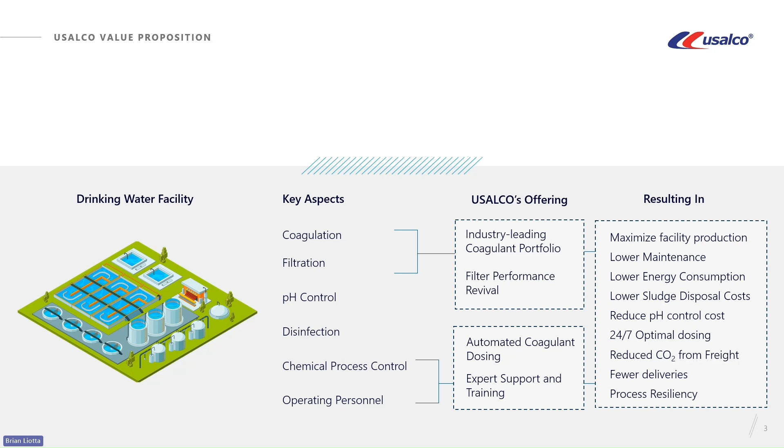As far as our product line goes, we offer a diverse range of advanced coagulants and polymers tailored to optimize water treatment processes. Our signature brands like DelPAC, UltraPAC, G-PAC, Delta-Floc, and UltraFLOC provide specialized solutions for various treatment needs. For iron and aluminum specifically, we manufacture a pretty comprehensive range, including all sorts of PACs and iron salts designed to enhance coagulation, reduce sludge, and improve water clarity. And our polymers, like the polyDADMACs and epis, offer additional tools to support efficient coagulation and liquid-solid separation.

And just to add a final comment before I turn things over to our other presenters, our product line is really infinitely customizable, and we take this approach to water treatment recognizing that every water system has attributes that make it unique. So ours is not a one-size-fits-all approach. We take a consultative view on each and every opportunity.

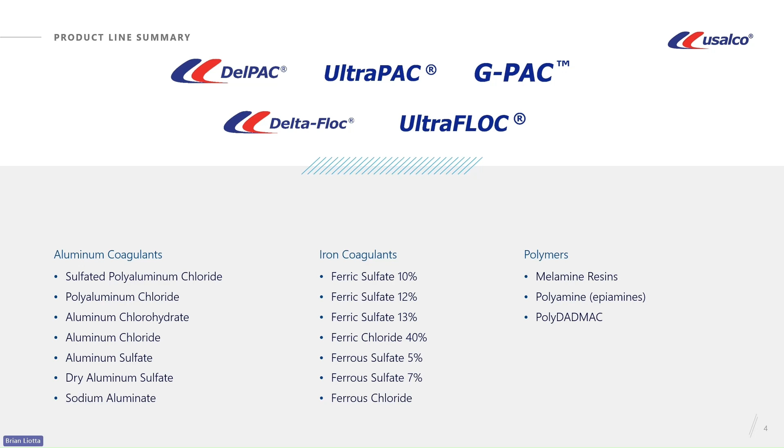And with that, I'm going to hand it over to Chris. All right. Oh, here just a moment. Let me get this back.

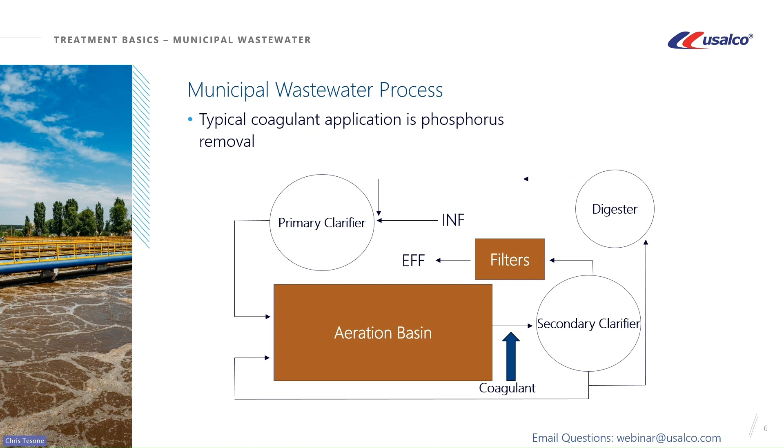Typically in a wastewater plant, the goals are phosphorus removal and improved settling rate. Is there an alkalinity impact? And if there is, try to minimize that. Always looking at sludge: can you reduce the amount of sludge? And then overall clarification. And this is more applicable in industrial applications rather than municipal, where you're looking at BOD, COD, FOG, in addition to phosphorus.

Phosphorus, it's a little more complicated. And one of the things that I always ask in working with municipalities or industrial customers, especially municipalities, is, what are your goals? Is it strictly phosphorus removal, or are you also looking for something that's going to help settling in your final clarifiers? Are you having any struggles with alkalinity? Are you using caustic or lime to boost that alkalinity, et cetera? So as you kind of do a people and a technical survey, those are some of the questions that you should typically ask.

And Chris, can I ask? So what I think I'm hearing is that municipals primarily use coagulants for phosphorus removal, whereas industrial users will use them for a variety of reasons. Yes. I mean, it's just a more complex wastewater. Municipal wastewater, and we'll get into this later, the characteristics of a municipal water influent, whether it's strictly residential, commercial, or if there's some industrial, that makes a difference as far as maybe your approach in the coagulant technology that you would use. But for the most part, in my experience, municipalities are strictly looking at just P removal.

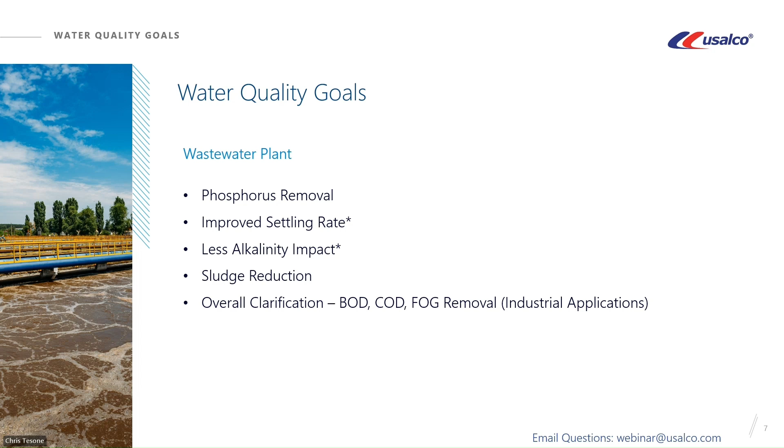So why is there a need to remove phosphorus? Essentially, nitrogen and phosphorus are essential nutrients for aquatic plant growth. And if there's too much nitrogen and phosphorus, a body of water can become what they call eutrophic, where you could have excess algae growth, depleted oxygen to sustain fish, unsightly odors, also potential toxins, microcystin. I think maybe folks on this call are aware of the problem that Toledo had, where the Toledo water plant was shut down a few years back because of a serious algal bloom in the western basin of Lake Erie.

Algae growth is also limited by the least available nutrient, which is phosphorus. Now, one of the developments, I believe it was probably 5 or 6 years ago, there was a study out that basically said a wastewater plant should not be too concerned with removal of nitrogen, because algae can fix atmospheric nitrogen on their own. So really, trying to reduce the amount of nitrogen discharged to a body of water really didn't matter, and the focus has to be on phosphorus.

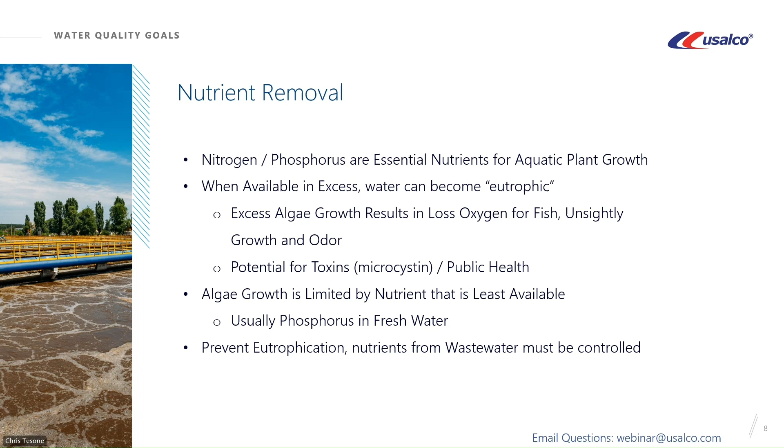When people think of phosphorus, maybe just to clearly define what it is and what it isn't. Pure elemental phosphorus is rare. Typically, phosphorus exists as a part of a phosphate molecule, and it can be organic or inorganic. Organic phosphate obviously has a carbon-based molecule associated with it, and it's in plant and or animal tissue. Phosphate that's not associated with organic materials is inorganic, and that form is required by plants. However, animals can use either organic or inorganic phosphate. And both of those types can either be dissolved or suspended in water. And that's an important point between soluble and insoluble phosphorus that we'll touch upon as we go through the presentation.

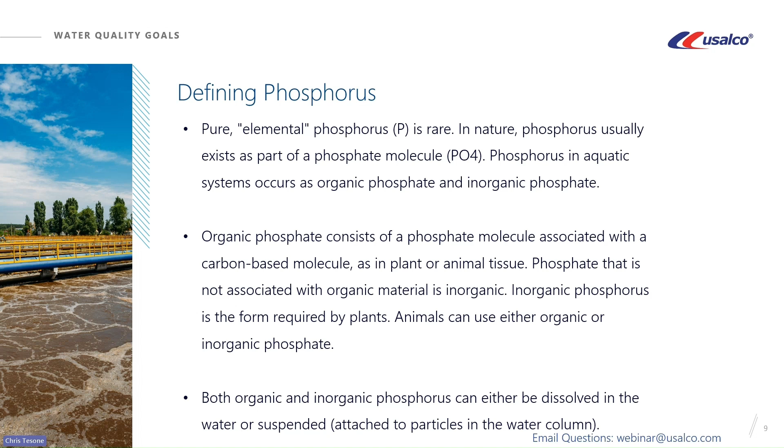Some operational definitions: most people know or measure total phosphate or orthophosphate. Orthophosphate is mostly dissolved and highly reactive, whereas you've got acid hydrolyzable phosphate, which is polyphosphates, metaphosphates, that are somewhat reactive. And then you have, I don't know if you would say they're exotic phosphates, but phospholipids, nucleotides, et cetera, which are mostly particulate but less reactive. And when we talk about reactive, we mean readily removable, that will readily react with a metal salt to facilitate removal. So what this is saying is the hydrolyzable types of phosphate are not completely removable, and the acid hydrolyzable we really can't remove. But for the most part, in a municipal application, most of your phosphorus that's coming into the plant is highly reactive.

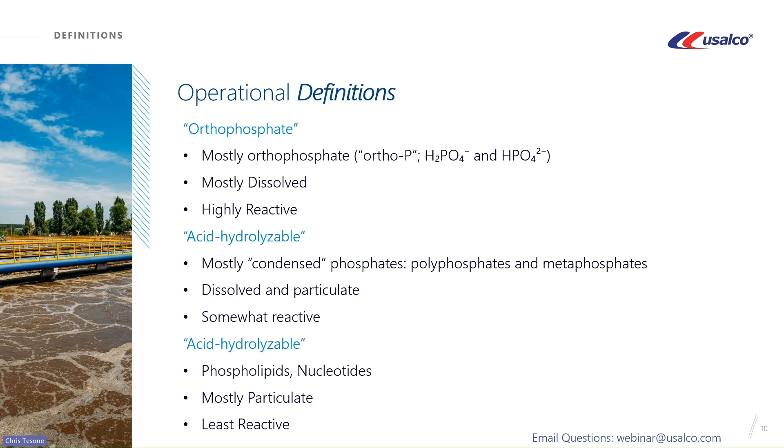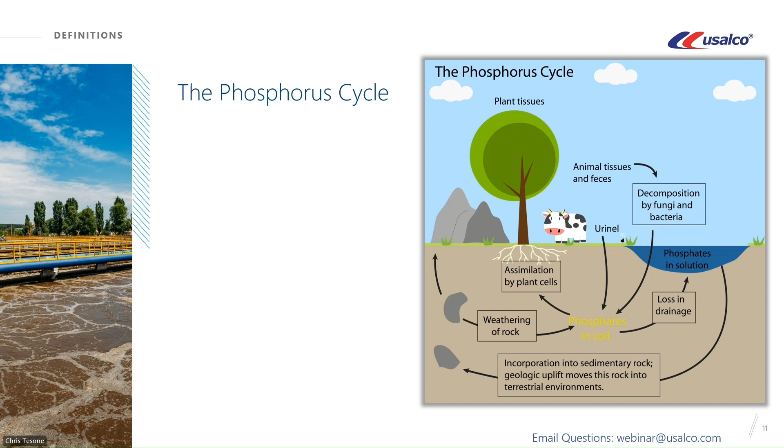Monitoring phosphorus, there's the total orthophosphate test. There's the total phosphorus, dissolved phosphorus. And I guess the point in all this is that, and we'll touch on this later when we talk about bench testing, the EPA, or the regulatory agencies, measure total phosphorus. So they really have no concern whether the phosphorus in their effluent is soluble or insoluble.

But it's important that we know that to be able to solve problems, but also to be able to do baseline bench testing, because really the focus of the coagulants is the reduction of soluble phosphorus and creating an insoluble material that's easily settled.

Phosphorus removal, and maybe this is a bit of a dated slide. It talks about the EPA mandating phosphorus in plant effluent. And that's still true, but my experience over the years has been that the federal EPA has kind of turned this over to the states. And restrictions do increase over time, but not as quickly as I anticipated 5-10 years ago. More and more municipalities are getting P limits, but it's not the magnitude that one would expect.

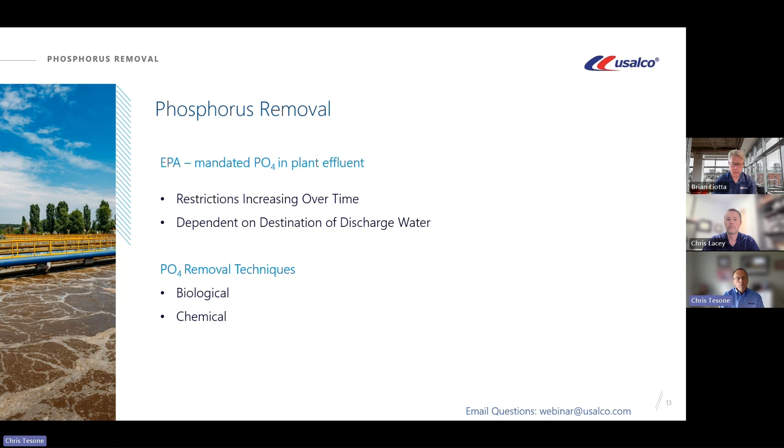We talk about technologies, biological and chemical. I've run into over the years very few plants that have strictly biological P removal. A couple reasons. Number one, you have to have certain nutrients and characteristics of your influent water, and that has to be consistent. And number two, one plant may have bio-P removal, another tries it, and it doesn't work because it really is specific to the influent. So I don't see many plants with biological removal. I do see some that go back and forth or use chemicals to supplement phosphorus removal.

For the longest time, it was believed that the reaction of a metal salt with phosphorus was strictly a precipitation reaction. Chris has referenced where this information came from on the lower right here, but really it's the reaction of the metal salt with the natural alkalinity in the water to form what they call an HMO. It's not a health maintenance organization, but a hydrous metal oxide.

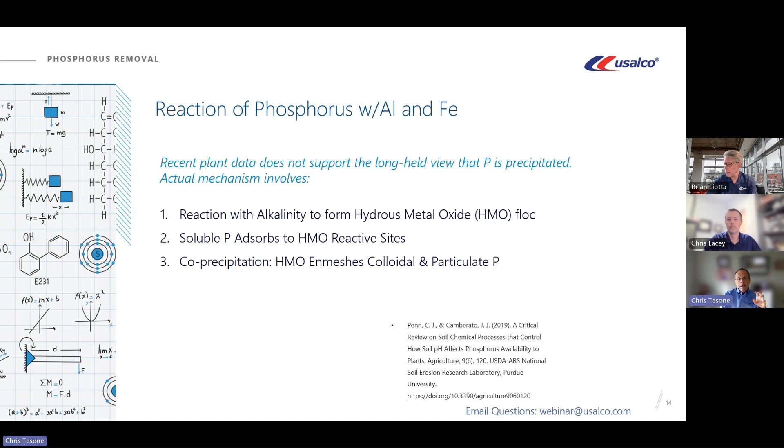Essentially, the soluble P will adsorb to the HMO reactive sites. And you also get a co-precipitation where the hydrous metal oxide will enmesh the colloidal and particulate phosphorus. The next slide does a really good job of depicting that. Thus, it's really important that you implement your coagulant at a point of good mixing to optimize the efficiency of your chemical dosage.

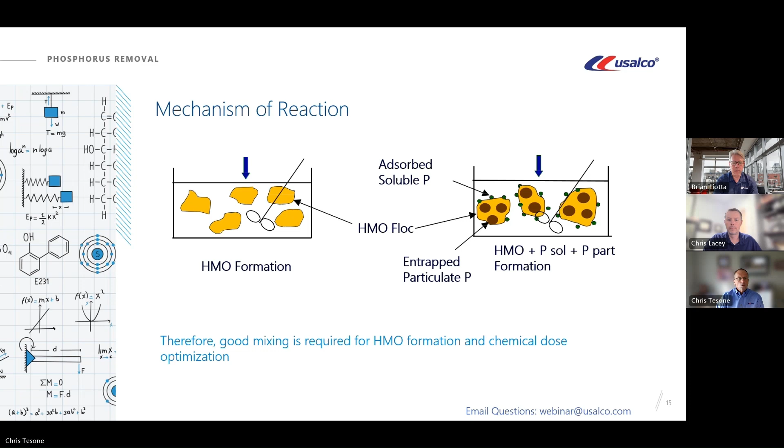So, when you look at a typical wastewater plant, usually you'll see 2 to 6 ppm of phosphorus in the influent. And largely that's residential. You may have some light industrial, and you can see here, if you have a food or metal processing plant, you could get higher levels of phosphorus, much higher, and they could be somewhat inconsistent depending on the process associated with that industrial discharger.

One of the things that I recall with an industrial discharger, there was a plant in Indiana which was taking phosphorus-laden waste from a meat packing plant into the municipal wastewater treatment plant. They'd just gotten their limit, and they were getting probably 16 to 20 ppm. They started off using alum, and they just couldn't meet their limit. They went to polyaluminum chloride, couldn't meet their limit. And then we got involved and took a look at things.

What we found out was that they were feeding enough, but they were overfeeding the coagulant so much that it was destabilizing the floc. And what was going out the door was more insoluble phosphorus than soluble phosphorus. So it was just too much for that particular coagulant to handle. So we looked at sodium aluminate, which has probably the second highest aluminum content of all aluminum coagulants, and it worked very well.

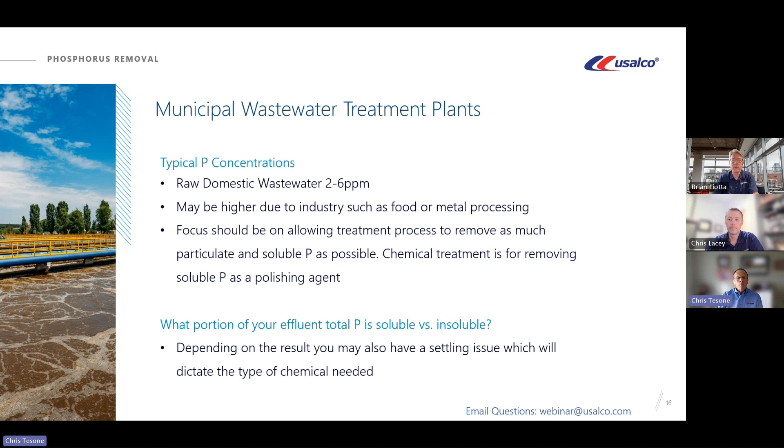Okay, so some of the typical coagulants used for phosphorus removal are aluminum chloride, aluminum sulfate, polyaluminum chloride, of which ACH would be included in that category, sodium aluminate, which I just referenced, and also ferric and ferrous chloride and ferric and ferrous sulfate.

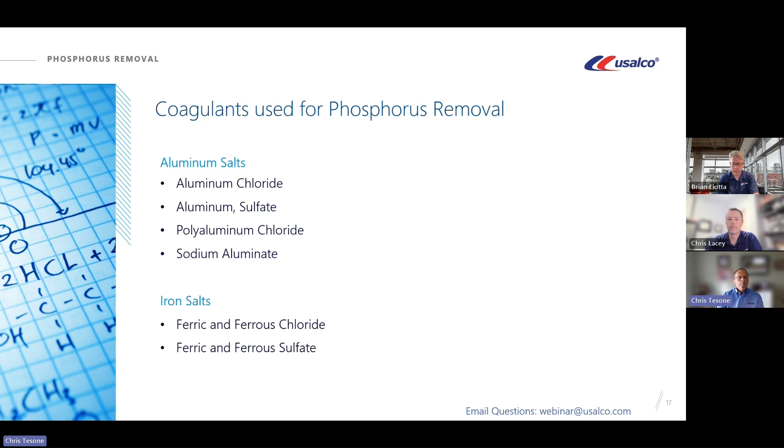Now, there is a big difference in aluminum versus iron, and I'm sure all of you are aware that iron can negatively affect UV disinfection. It's no secret. Some of the major UV manufacturers like Trojan will readily advise in their literature that you could get staining of bulbs, et cetera. And my experience has been, depending on the superintendent, sometimes it's a big deal. Usually it's not a big deal.

But it is true that iron can interfere with the disinfection, because it's absorbed onto suspended solids and bacterial floc and can prevent UV light from getting to those target microorganisms. And essentially, with UV systems, and I've done trials and seen this, you can run your UV system at a lower rate. So there's some energy savings because of better transmission.

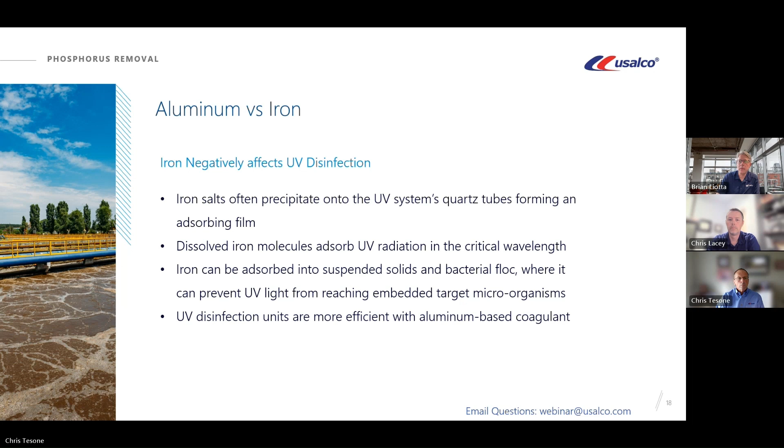Another difference between aluminum and iron is that the aluminum molecule weighs less than half of what the iron molecule weighs. So you really have twice as many molecules in a pound of any aluminum-based coagulant as opposed to an iron-based coagulant.

And another key aspect, although I've only seen it once in my career, is that iron under anoxic conditions will release phosphorus, whereas aluminum, once that HMO absorbs and traps that phosphorus, does not let it go. I saw this years ago at a trial in Western Ohio in a college town.

Their flows were much lower in the summer, and they just let their sludge get too old. And I think they were running one more final clarifier than they should have been. All of a sudden they start spiking phosphorus, and they had more phosphorus going out the door than they had coming in. And what we determined was exactly what I just described: they were using ferrous chloride, and the iron was releasing the phosphorus.

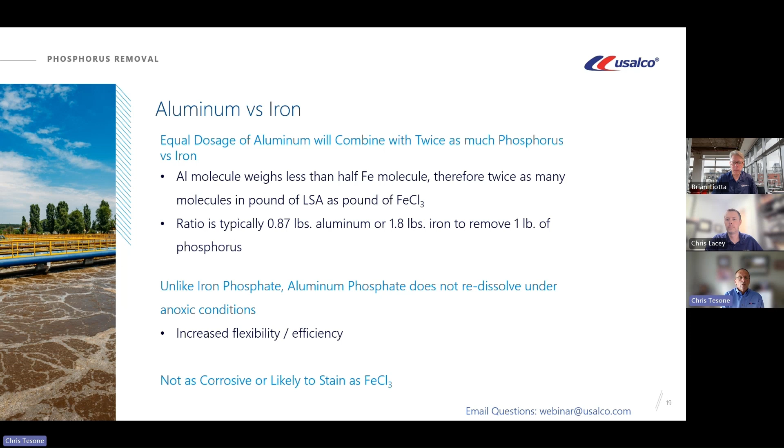Another aspect that's not depicted here is the basicity of the various aluminum coagulants. What I have found, with ACH, obviously it has the highest basicity at 83%, also has the highest aluminum oxide content at 23. So you think, wow, that's the most concentrated product. We should use that. Well, and we'll talk about it when we go through the bench testing, but what I have found is in municipal water treatment, wastewater treatment, the higher the basicity, the less effective the coagulant is in phosphorus removal.

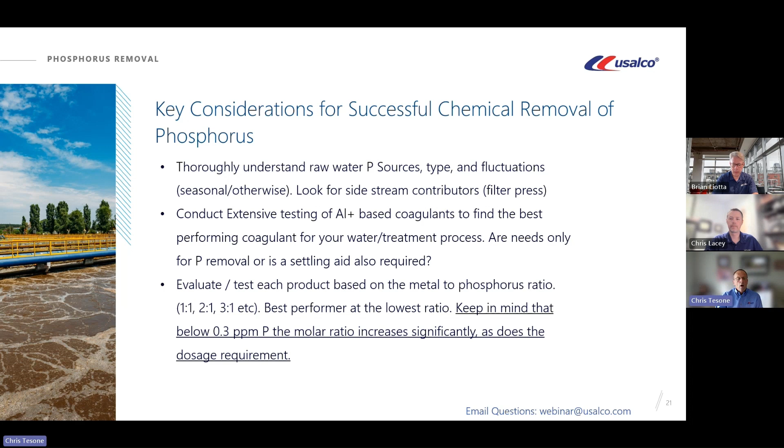But one of the other things to keep in mind is that it's been proven that at any phosphorus concentration below, say, 0.3 ppm, the molar ratio increases dramatically, meaning you're going to need much, much more of the metal salt to get the phosphorus below 0.3 ppm. That seems to be the cutoff point where it just really spikes. So if you're in Wisconsin and you've got a plant that has a technology-based limit, and I've seen limits up there like 0.07, 0.05, not to say that the aluminum or iron won't work, but be mindful of the 0.3 ppm, because below that, your dosages really spike up. And there are some other ways you can address that with some other products out there once you're below 0.3 ppm.

Feed point and mixing are key. Another important point is that some folks do feed at the head of the plant, or have 2 feed points. The issue with that is you will get other constituents in the raw water at the head of the plant that will compete with the phosphorus for the aluminum. So typically your molar ratios at the headworks are going to be higher than they are if you're testing right before secondary clarification.

Other things to look at: impact of chemical on effluent pH and system alkalinity, ammonia removal, sludge dewatering, and we talked a little bit about that, UV. Reviewing systems for compatibility, design around the best coagulant. What about their storage and handling? Different coagulants have different freeze points, different crystallization points. Where are the tanks located? How long are the feed lines?

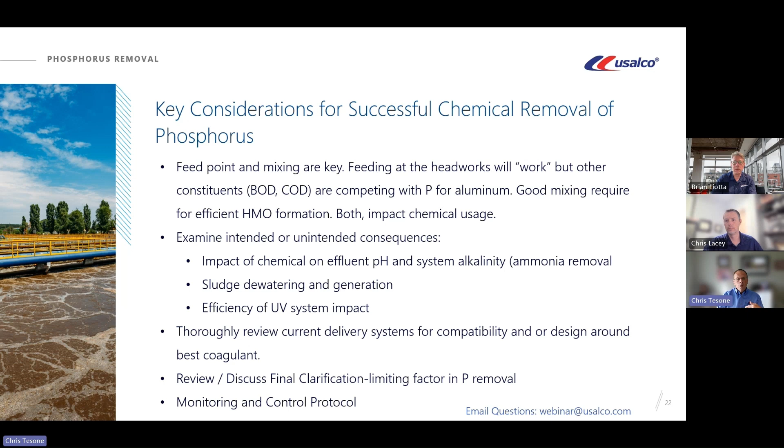Also, the final clarification as it pertains to solids settling, and also monitoring and control. How are they, or how will you, distribute the coagulant? What is their control protocol? How frequently are they testing? Is the feed flow paced? Is it just base fed, etc.? Now getting to the fun part of jar testing.

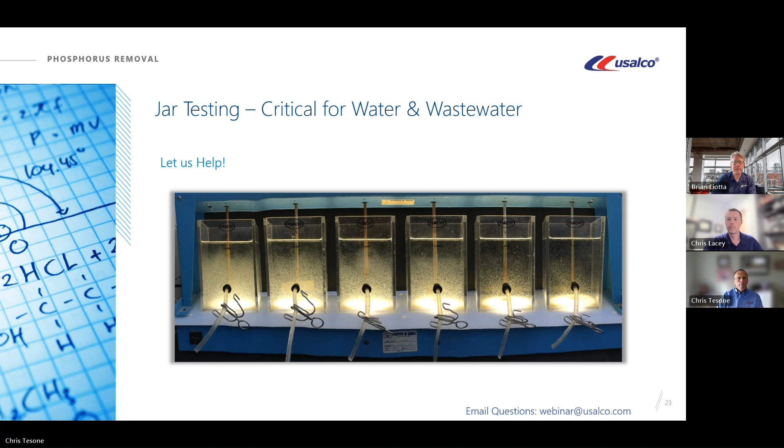So again, we're focused on phosphorus removal. We're looking at the molar ratio when we test various coagulants, various aluminum concentrations, but you want to test them on an equal metal basis at various ratios. So if one aluminum coagulant is higher in concentration than the other, both at a 2-to-1 ratio, obviously the higher concentration chemical will have a lower dosage requirement.

Sample point is critical, and this kind of goes back to what I just said about the headworks. So you go into a plant, you're going to do jar tests, and let's say they're already using another coagulant, iron or whatnot. So the challenge becomes, well, if I take my sample post aeration, how much of that particular coagulant, iron, do I have in there?

So oftentimes I'll test prior to the addition of any coagulant. I'll test after the screen, test the influent, and I'll test the aluminum coagulants, but also test the incumbent coagulant, typically iron, because it's not going to be efficient at that point. So you test their current coagulant and the other coagulants to put everything on equal footing, understanding that the molar ratio is going to be higher when you're treating a dirtier water, but it's very difficult, if not impossible, to predict how much higher.

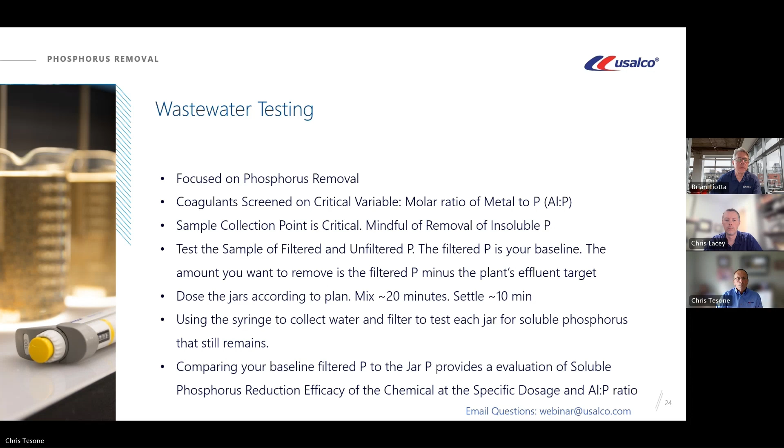Some basic calculations. So if you had a 1.5 MGD plant with 8 ppm of phosphorus or orthophosphate on the influent and a discharge limit of 1 ppm, your desired P reduction would be 7 plus parts of soluble phosphorus. Now, this brings up another interesting point: if a plant has a limit of 1, where do they really want to control that? Some plants will control at 0.8. Some plants like to be lower because of fluctuations in their influent or their chemical feed system, and they like to have that buffer.

So an important question to ask, if they're currently treating, is where do you like to control that effluent phosphorus number? And typically when I start jar testing, I'll start with the coagulants all at a 2-to-1 molar ratio, aluminum to phosphorus. And then from there, can I go lower or do I have to go higher?

So the first thing you want to do is quantify the P that you want to remove. So you take the flow at 1.5 MGD times the 7 plus ppm, and then the density of water, and you get 88 pounds per day of phosphorus that you need to remove to achieve compliance.

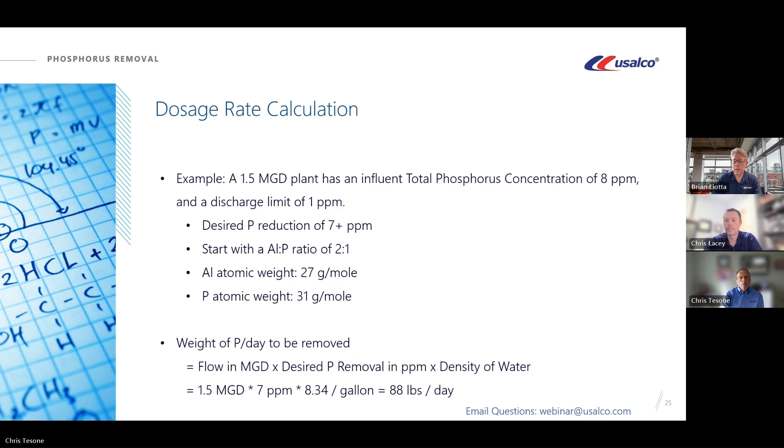So how much aluminum do you need to remove those 88 pounds of phosphorus? You would take the atomic weight ratio of aluminum to phosphorus, times that molar ratio of 2, times the 88 pounds to get 153 pounds of aluminum that you'll need to remove 88 pounds of P. Now, in this specific example, I've chosen sodium aluminate as my coagulant. How much sodium aluminate am I going to need to feed to get 153 pounds of aluminum?

So essentially, you take the pounds and divide by the density of sodium aluminate, which is 12.3 pounds per gallon, and it's 10.6% aluminum, and you'll get 117 gallons a day of 38% sodium aluminate to deliver the 153 pounds of aluminum that you need.

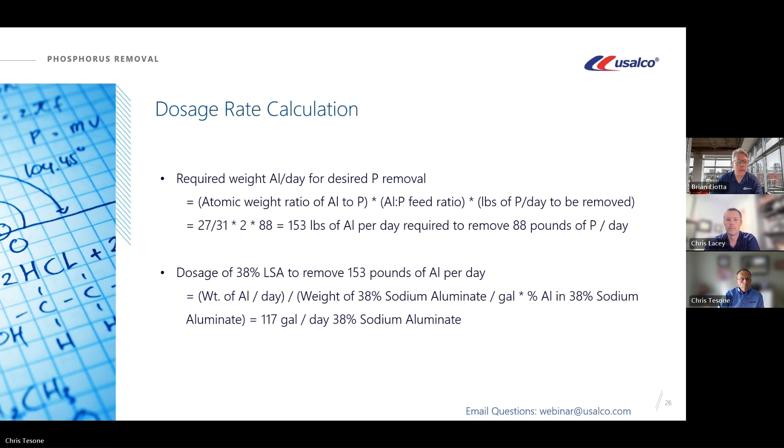We kind of touched on this earlier. The best feed point is post aeration, right before secondary clarification. Also, you want to feed the products neat. You really don't want to use carrier water if you don't have to. I've seen instances where if that carrier water is city water that has phosphorus in it, there's a reaction there. So you really don't want to use carrier water.

And also, again, account for all the phosphorus. Are there recycle streams from pressing sludge? And the last important point is mixing, again, is critical for HMO formation.

And I think with that, I'll hand it back to Chris Lacey. All right. Thanks, Chris.